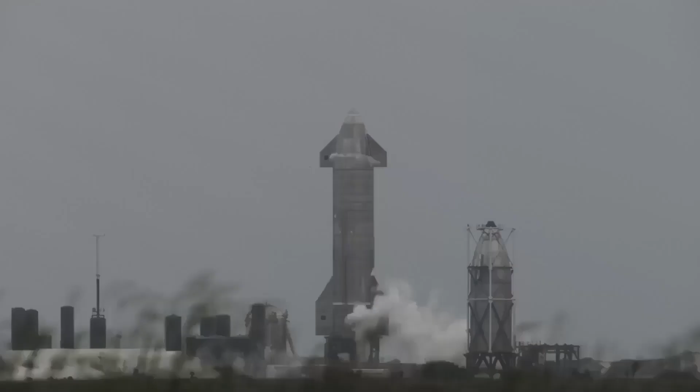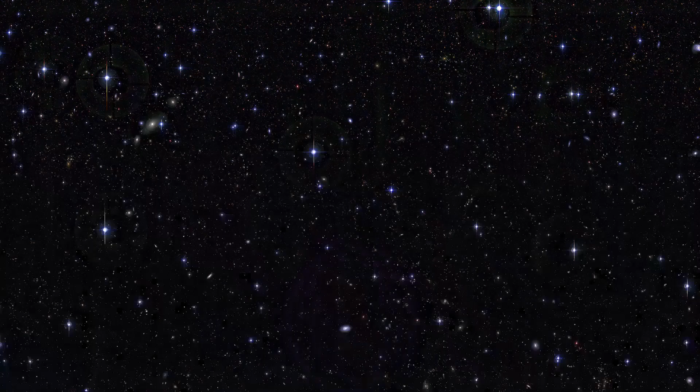SpaceX has been in the news a lot for the past few months. Back in May 2021, SpaceX successfully performed a high-altitude flight test of the Starship rocket. Now, SpaceX is getting ready to perform a flight test of the whole Starship system with the Super Heavy booster stage powering it. For those of you who are not aware of the Starship project, it is an orbital rocket being developed by SpaceX that Elon Musk plans to use as a transport rocket in his goal to colonize Mars.

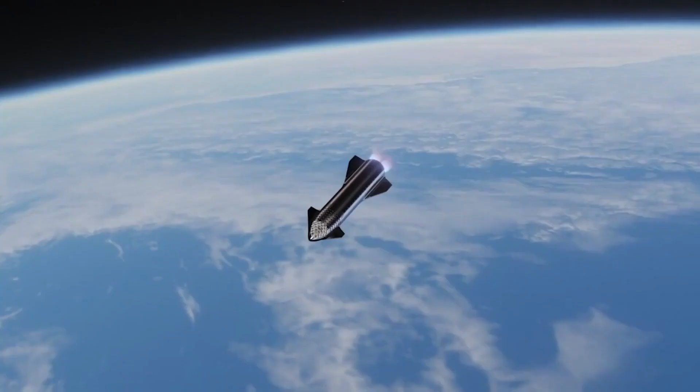But what makes the Starship such a unique rocket? According to many industry experts, that would be SpaceX proprietary rocket technology that is being developed specifically for the Starship. That is the Raptor rocket engines. Let us take a look at how the Raptor rockets work and why they are the best rocket engines ever made. A brief look at the Raptor program.

Elon Musk started the Starship program because he wants to help humanity become a multi-planetary species. Elon Musk envisions that humankind has reached the technological level to finally start thinking about colonizing other planets so that we may grow as a species. But becoming a multi-planetary species is easier said than done. With the Starship program, Elon Musk is tackling the first major problem of colonizing other planets. That is, how do we get people and stuff to another planet?

Starship is SpaceX's and Elon Musk's answer to that. A spacecraft designed to carry crew and passengers on a long-distance journey to not just Mars, but other planets in the future. But to successfully achieve that, Elon Musk had to not only rethink rockets, but also rocket engines. And since Elon Musk is a big fan of vertical integration, the Raptor engine program was started. SpaceX would design and manufacture their own engines for their interplanetary transit vehicle.

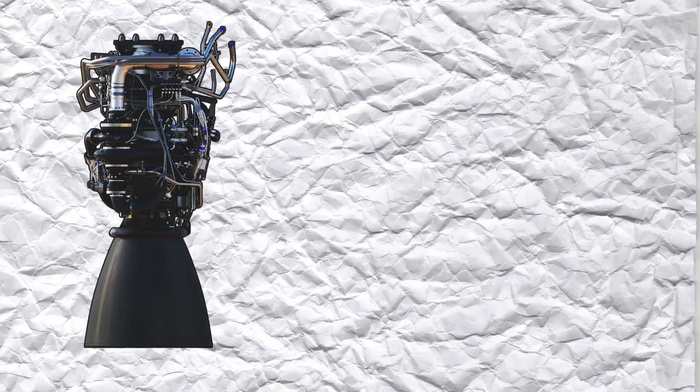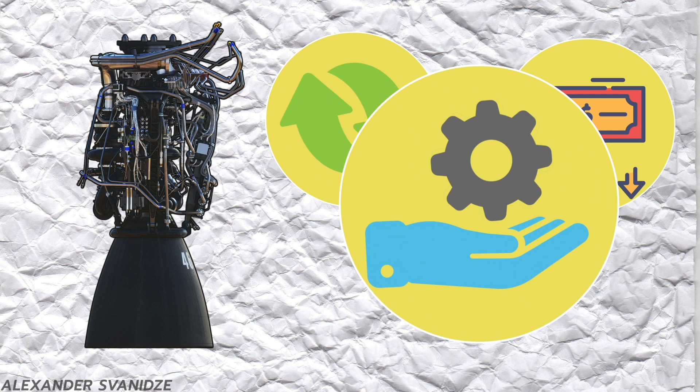For Elon Musk, three things were important in making their rocket engine. First, the rocket engine should be completely reusable with minimal servicing. The second, it should be cheap to manufacture. And the last thing was that the technology would be made as simply as possible, so it was easier to scale. These were the goals set for the Raptor engine program as it evolved throughout the years.

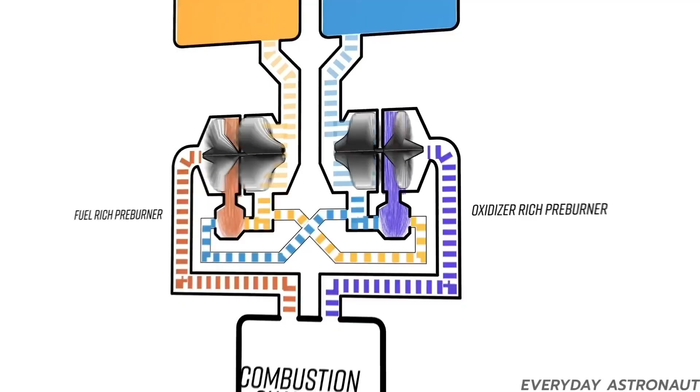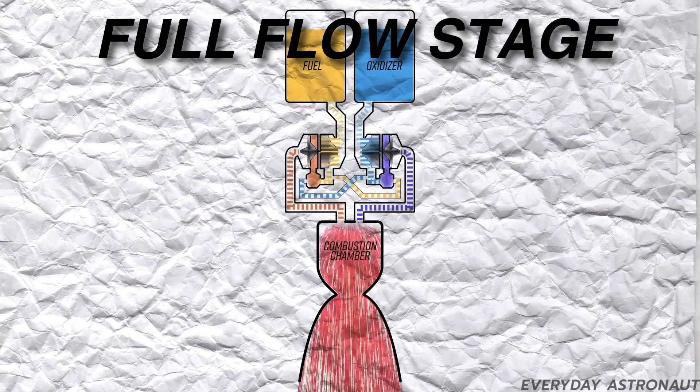How the Raptor engine works. The Raptor engine works on a thermodynamic cycle called the full flow staged combustion cycle. Without making this a lecture on university-level thermodynamics and literal rocket science, let us take a very brief overview of how the Raptor engine works. The full-flow staged combustion cycle works with two separate turbines. One is oxygen-rich and the other is fuel-rich. These two turbines drive the fuel and oxidizer turbopumps.

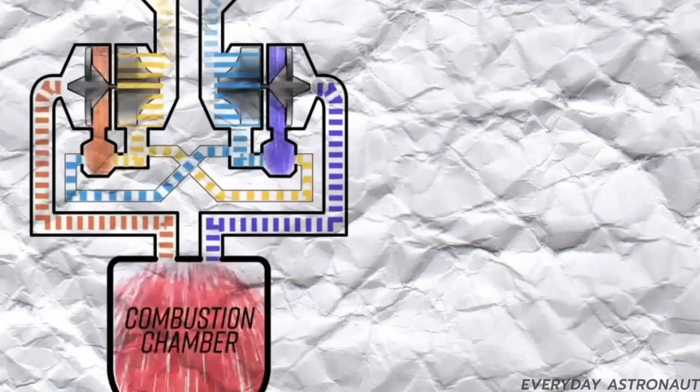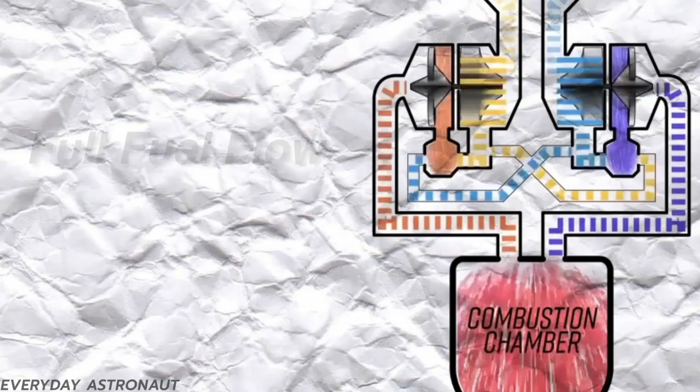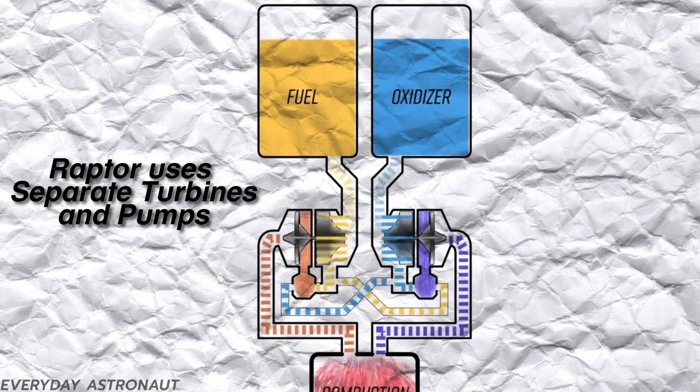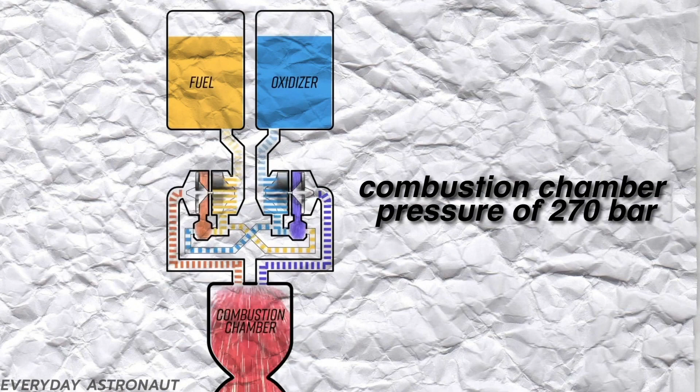The oxidizer turbine is driven by high-pressure gas generated by combusting nearly 100% of the oxidizer flow with a fraction of the fuel flow in an oxidizer-rich pre-burner. The fuel side uses the full fuel flow with a small fraction of oxidizer to generate the pre-burner gas that drives the fuel turbine. The Raptor uses separate turbines and pumps on the fuel and oxidizer. The boost pumps deliver the necessary inlet pressure for the operation of the main turbopumps to create a combustion chamber pressure of 270 bar. This is the highest achieved by an operational liquid-fueled rocket engine.

The reason SpaceX went with a closed-cycle engine is that it makes the engine more suitable for reusability. Other benefits of using this cycle are that it allows the turbines to run cooler. This is due to increased mass flow. This ultimately leads to longer engine life and higher reliability. An engine with longer life and high reliability means it can be safely reused multiple times without servicing. This will significantly cut down costs and downtime between launches. According to SpaceX, the Raptor engine is currently rated for 50 flights.

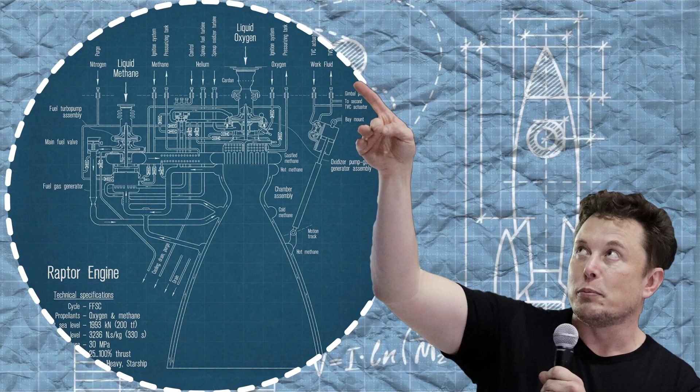Making fuel for Raptor on Mars. SpaceX made a very interesting design choice with the Raptor engine. See, most rocket engines use RP-1 or rocket propellant as their fuel. RP-1 is basically a more refined version of jet fuel.

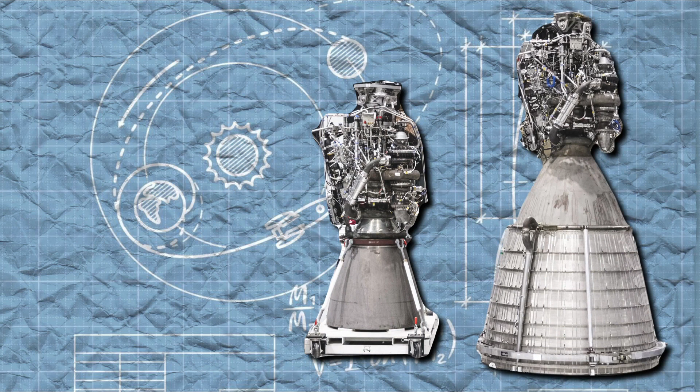In fact, previous engines made by SpaceX, like the Merlin engine that powers the Falcon 9, also use RP-1. But for the Raptor engine, SpaceX decided to use cryogenic liquid methane as fuel. This was a little confusing at first, but SpaceX later explained the reason for going for an engine that runs on methane is that if we look at the geological landscape and atmosphere of Mars, we can see the abundance of CO2 and frozen water on Mars.

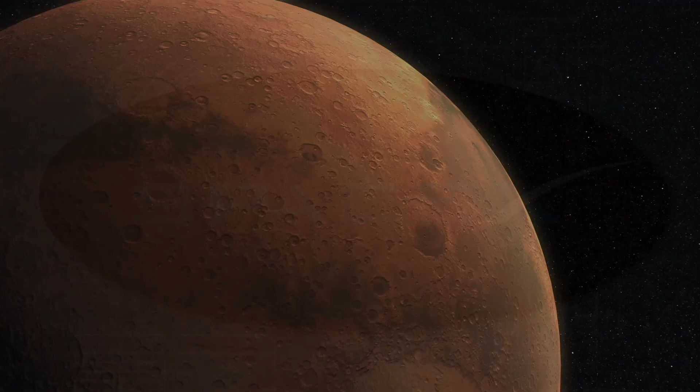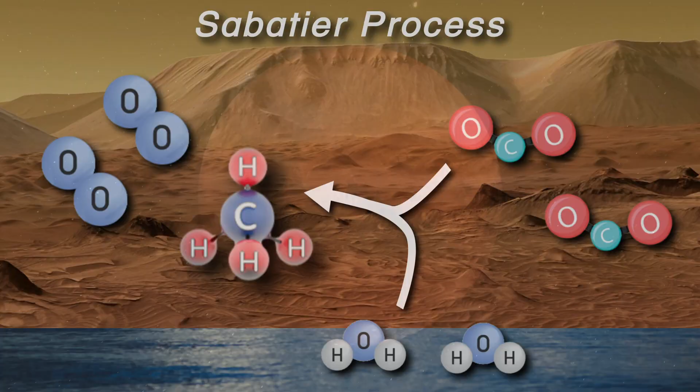SpaceX plans to make its own methane on Mars by using a process called the Sabatier process. The Sabatier process uses carbon dioxide and water to make methane. Oxygen comes out as a byproduct. If SpaceX can make their own fuel on Mars, there will be no need to carry extra fuel for the return journey from Mars, as there will be local fuel available to refill the Starship. It is a very well thought out plan.

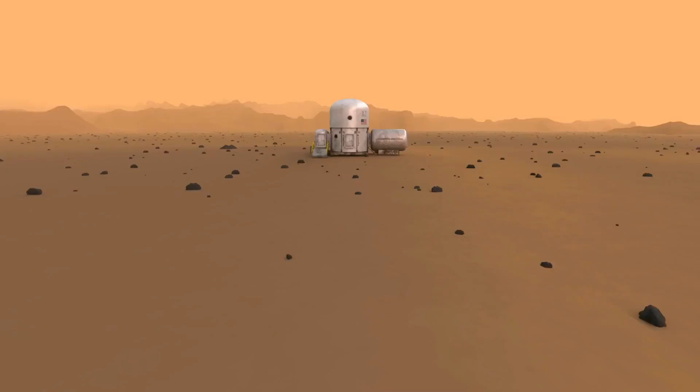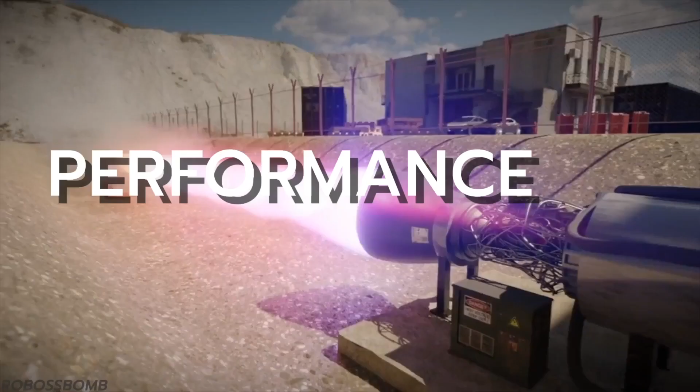This whole process comes under the philosophy of in situ resource utilization, or ISRU, which is a concept about ways you can use local resources to your advantage. And the Raptor engine was made with ISRU in mind for Mars. Performance of the Raptor engine. It's not enough that the Raptor engine is using an unconventional thermal cycle. What everyone cares about is how it performs during operation.

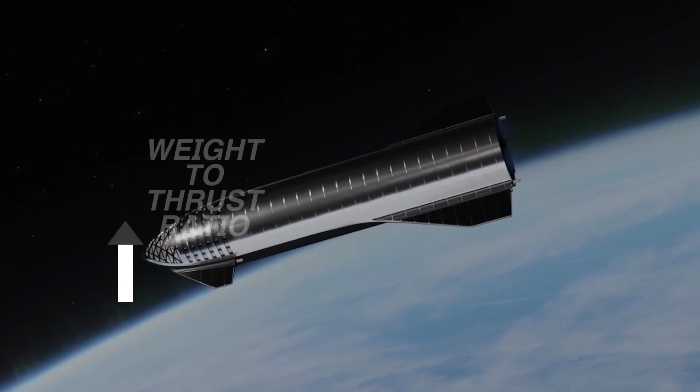One of the most important things that scientists look for in a rocket engine is its weight-to-thrust ratio. The weight-to-thrust ratio of a rocket engine is calculated by dividing the amount of thrust the engine produces by the weight of the engine itself. The higher an engine's weight-to-thrust ratio, the faster it will accelerate. The Sea-level Raptor engines have a weight-to-thrust ratio of about 107, and SpaceX is aiming for a final weight-to-thrust ratio of 200. This is really impressive if we compare it to other rockets.

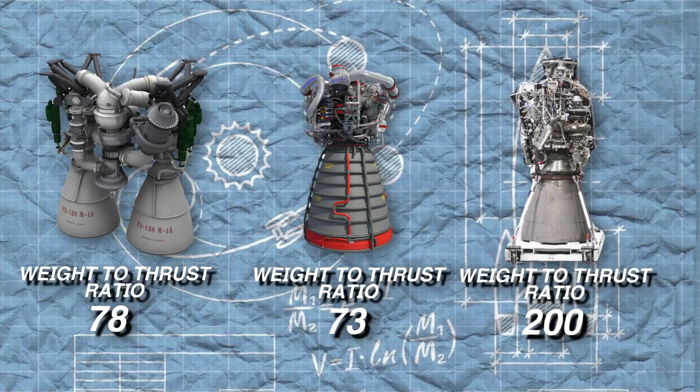For comparison, Rocketdyne RS-25 has a weight-to-thrust ratio of 73. RS-25 powered both NASA's Space Shuttle and their Space Launch System. Or if we take Energomash RD-180 that was used for the Atlas III and Atlas V rockets, it has a weight-to-thrust ratio of 78. Even Blue Origin's BE-4 engine sits at a weight-to-thrust ratio of 80.

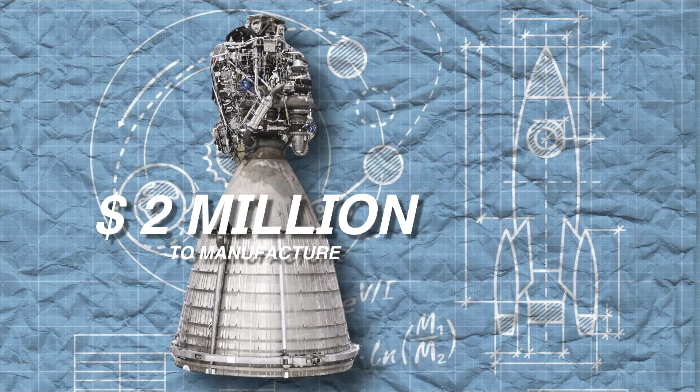How does the Raptor engine compare to other rockets? So how does the Raptor engine fare against other rocket engines? It is important to note that different rocket engines are made with different uses in mind. So we will be comparing the rockets in terms of cost and performance. Cost. According to SpaceX, each Raptor engine will cost them $2 million to manufacture. This is insanely cheap when compared to the Rocketdyne RS-25 and the Rocketdyne F1 engine used by NASA that each cost $50 million and $30 million respectively to manufacture.

Now, if we look at it from a cost per thrust perspective, we will see that the Raptor engine wins again. The Starship's Raptor engine costs $1,000 per 1 kilonewton of thrust. In comparison, the RS-25 costs $26,881 per 1 kilonewton of thrust produced, while the F1 costs $4,431 per 1 kilonewton of thrust produced. And since a single Raptor engine is rated for 50 flights of reusability, we can bring that cost down to just $20 per 1 kilonewton of thrust produced, which is absolutely insane. No other rocket engine comes close in terms of value.

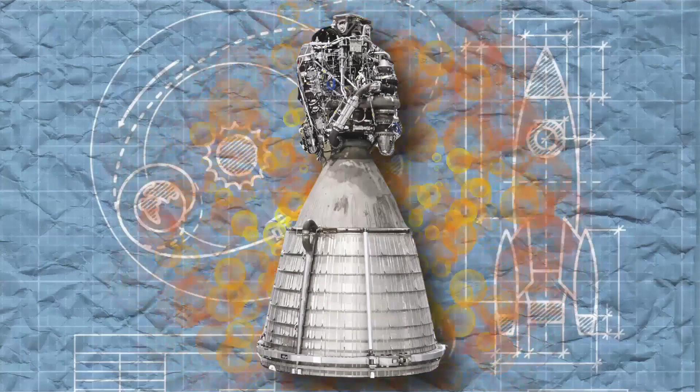In terms of reusability, we will see that most engines weren't designed with reusability in mind. Usually, rocket engines were made to be good for one flight, but we see that the Raptor engine can do up to 50 flights. In comparison, the BE-4 engine by Blue Origin can only do 20. SpaceX wants its rockets to be reusable and be ready for consecutive flights with minimal servicing.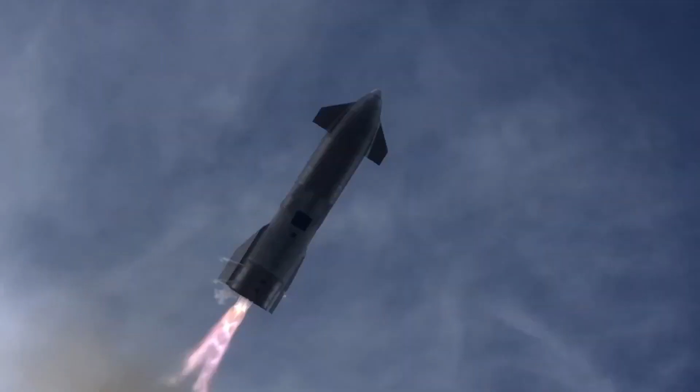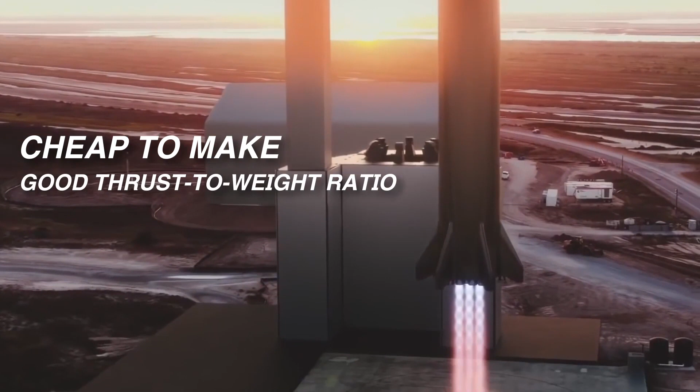The Raptor engine might not have been the very best at everything, but the reason the Raptor wins in the end is because it does everything really well. It is cheap to make, has a good thrust-to-weight ratio, and is cheap to operate, making space exploration more accessible. The Raptor engine truly is a feat of modern engineering.